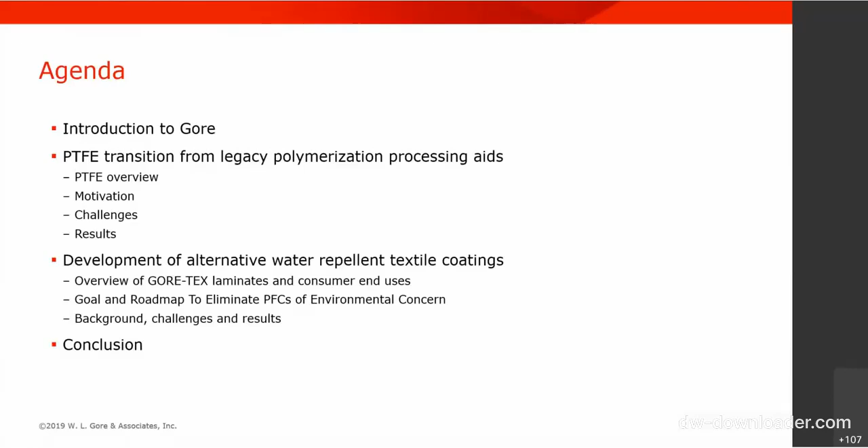Some of the audience might not be familiar with W.L. Gore & Associates. We were founded in 1958 by Bill and Vieve Gore in the basement of their home as an entrepreneurial venture. It was built on the belief that the new polymer could provide high value to society. And they also had a vision of how the company could be organized to best utilize the talents of each person in that enterprise. And today we've grown to over 10,500 associates. We refer to our employees as associates, which emphasizes everybody shares in the success of the enterprise. And our annual revenues are around $3.7 billion. And we remain privately held so we can focus on the long-term payoff rather than short-term gain.

So our 60 years of research in expanded fluoropolymers is the core of our technical capability, and our fundamental understanding of the properties of PTFE-based materials helps us with the thousands of products that we are able to produce to change outcomes for people around the world. So one of our core values at GORE is our commitment to delivering products that meet our customer expectations and are fit for their intended end use. This sounds like a simple premise, but it differentiates us from our competitors because of our deep commitment to use sound science and fundamental understanding of our products to ensure that we can live up to this standard and stand behind our products.

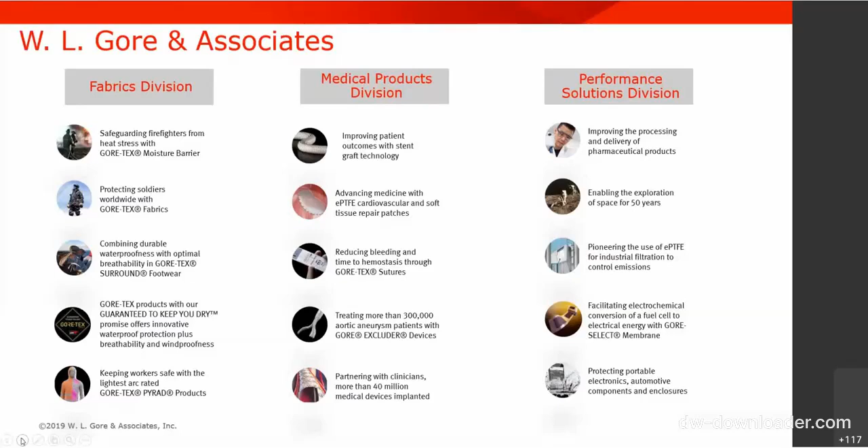And since discovering the expanded PTFE, like I said, we call it ePTFE, in 1969, Gore developed products using the combination of this ePTFE and complementary material science expertise, so we can have a good understanding of the application requirements. And with each new application, we're delivering some materials that improve lives.

So a quick overview of PTFE. So PTFE is polytetrafluoroethylene. It's the most common fluoropolymer used by Gore. It's a simple structure. It's a carbon backbone with fluorine attached directly, and it's a very large molecular weight, estimated to range from hundreds of thousands to millions of Daltons.

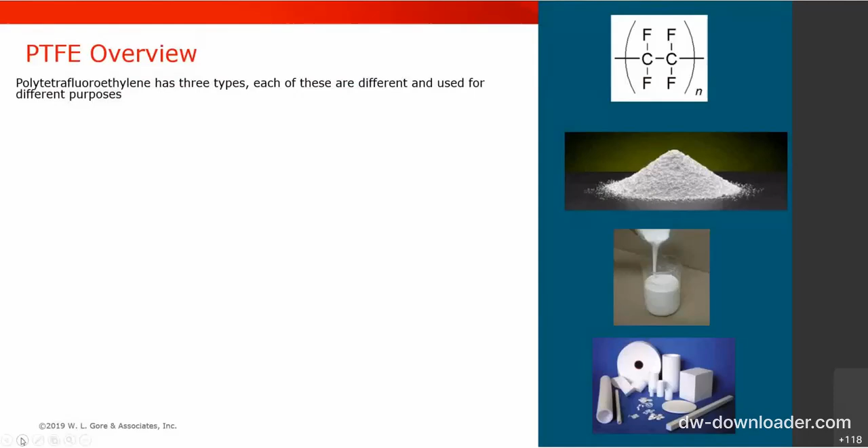And so the type of PTFE that we use is called fine powder. So it's pictured on that top image there. It's a fine white powder, and it's polymerized using a process that requires a polymer processing aid. So this is where the PFAS of concern enter the supply chain. And so for Gore, prior to 2015, our suppliers used PFOA and then transitioned to something else after that. And that's what we're going to talk about today. So this polymer is what we use to make our products.

Another version of PTFE is called an aqueous dispersion. It's a suspension of the same PTFE particles in a water-based mixture. And so it uses the same polymerization route. It does use the PPA as well. And it's used for coating different articles.

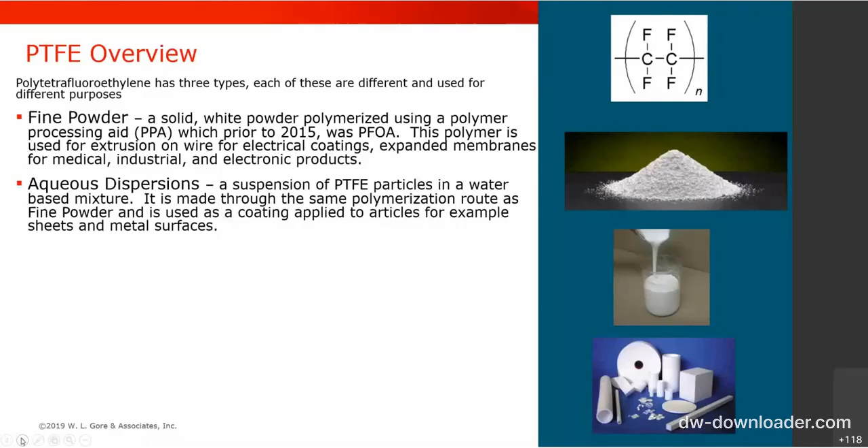And finally, the third version of PTFE is called granulated powder. It's also known as molding powder. And it's made through a different polymerization process that does not require that polymerization processing aid. And so it has its own unique market, but for Gore, it is something that does not fit with our needs. We cannot make expanded PTFE articles with this type of PTFE.

So typically, PTFE and other fluoropolymers have not been the focus of regulatory restriction efforts like those being applied to PFAS of concern. This was demonstrated in a peer-reviewed article that PTFE satisfies the OECD consensus criteria for a polymer of low concern.

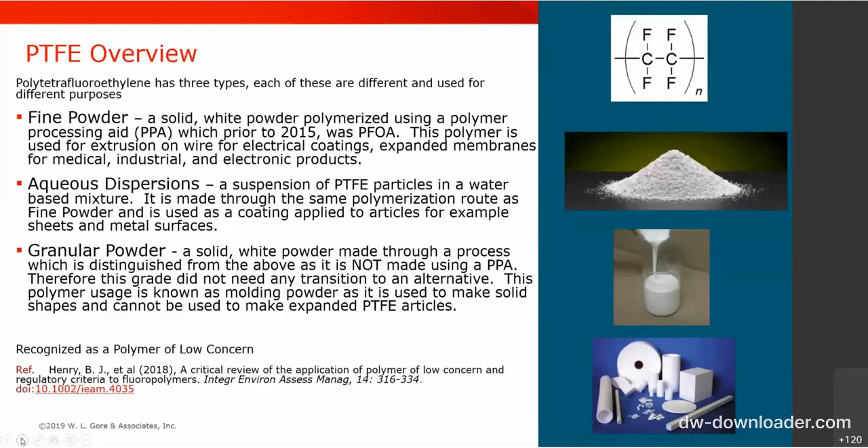So now I'd like to talk about the transition from the historical use of PFOA into the alternatives for the fine powder PTFE. So in 2006, the US EPA started a voluntary stewardship program and invited 8 manufacturers of fluoromaterials to reduce the PFOA emissions by 95% before 2010, and then virtually eliminate them by 2015. So Gore was not the manufacturer of PTFE, but participated as a processor. As you can see, the significance of this change would impact all the products made by Gore.

And so the connection between Gore and this transition was the trace residual PPA presence in that purchased PTFE, which is then further reduced in our processing. This transition would be really disruptive to the industry. If you think about it, there's been 50 years of operating experience and optimization, and now a new technology would have to be used to redevelop all the PTFE fine powder grades.

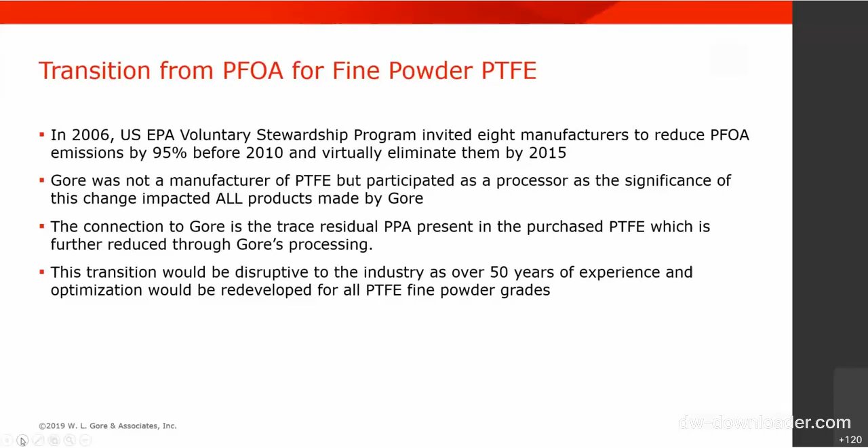So here we see a timeline that shows the regulatory progress of PFAS of concern in the top section, with Gore's investments and initiatives below the dashed line. Gore established initiatives to address safety, health, and environmental needs to continuously improve our process. We voluntarily invested in better control technology for each process and plant that was processing PFAS of concern.

When Gore suppliers transitioned to alternative polymerization aids, we put together a cross-functional team to evaluate the alternatives to minimize Gore's associate exposure to the alternative polymerization aids, verify the effectiveness of our environmental controls, and also assure that any small residuals remaining in our products cannot affect the safety or performance of our products.

So one of our goals was to do product stewardship reviews, and so we employed our Gore toxicologists who assisted us with the transition to the PFOA replacements by using sound science and standard best practices for toxicological risk assessment. The bottom section is showing the products and how they've undergone changes related to this topic over time as well. So our transition from long chain to short chain chemistries began in the late 1990s and involved new coating technologies for fabrics over the last 2 decades. And John will address this topic in his portion of the presentation.

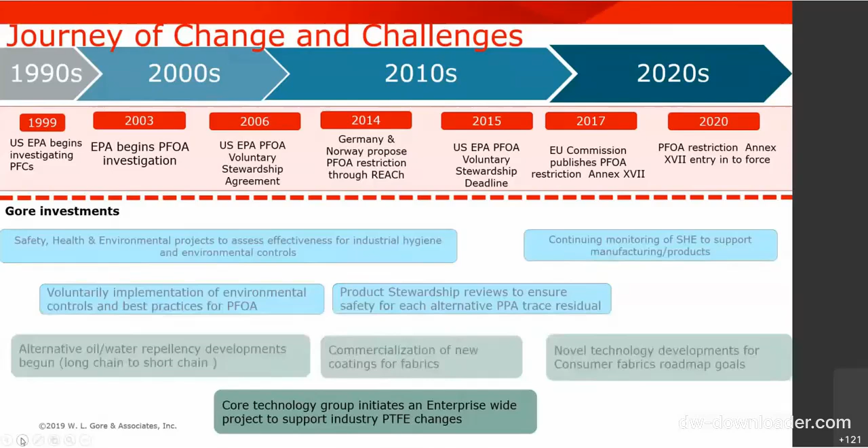So our journey started with assessment of, and requirement that, our PTFE performance for our future state had to match the original. And so to do that, we had to look at all the mechanical and thermal properties that were related to the PTFE. So if you remember the slide in the beginning with the division of products, it's a large number of products shown. So the magnitude of this challenge was kind of demonstrated early on when we were trying to assess what we would have to accomplish and look at the quantity of products that we might have to undergo this retesting for the fitness for use for our markets.

And so doing that, we mapped out the entire catalog of products that we used by division to try to put this information into a spreadsheet to get a handle on the project scope. And what we learned was that Excel 2003 did not have an infinite number of rows. It runs out at row 65,536. So we basically broke Excel.

So using some other tools, we put the whole product portfolio together and realized that we had 95,000 parts to assess. And so to shorten up that time frame for doing that assessment and evaluation, we had to find ways to really clearly identify the key attributes of the PTFE. And so we looked at it as an exercise to fingerprint the performance. And so to do that, we had to look at developing new techniques to do the analytical testing.

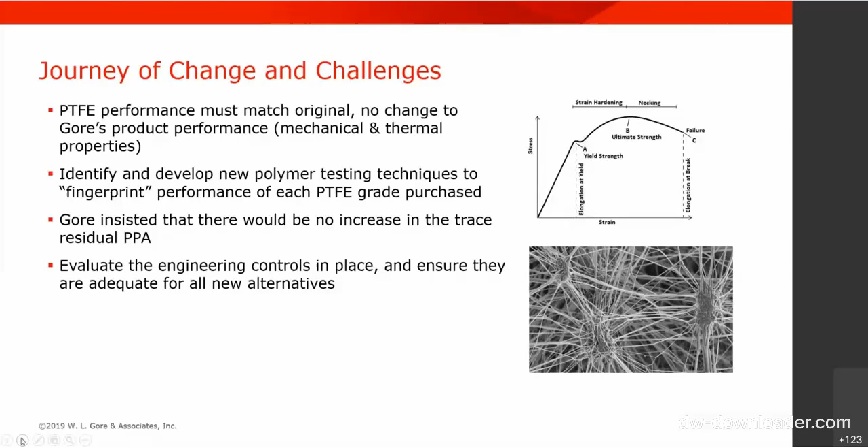And so the development cycle took many iterations, and although it reduced the amount of testing and qualification experiments necessary to prove the equivalence, numerous validations were still required to satisfy our product claims and our customer needs. But along the way, we also had to make sure that everything was suitable for our process, and so we had to evaluate the engineering controls we had in place through the processing as well as our environmental controls to ensure that they were adequate for the replacement alternatives.

And so at the end of this journey, we did successfully transition all of those products on time and without disruption. And so this took hundreds of associates to tackle this job. And because of this commitment to ensuring these products were going to be fit for use, we stopped doing a lot of innovation so that we could focus on this technical challenge. And so during the 9 years it took us to transition from the early development stages of the PTFE available through the success of the Gore products, we spent a lot of hours not doing new product development.

So the ray of sunshine through this change was we sure learned a lot more about how to paste process PTFE and relate that to the products and performance. And so we're able to use that knowledge that we learned to leverage into new product developments today.

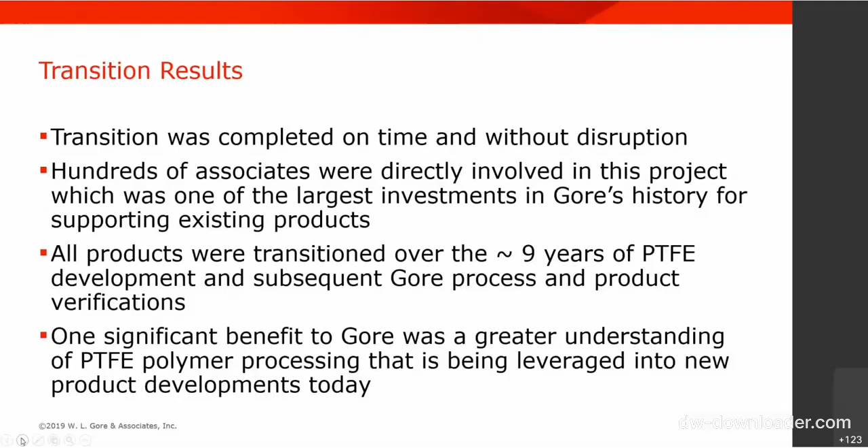So hello, my name is John Hammerschmidt. I'm the Sustainability Technical Champion for Gore Fabrics Division. As a matter of introduction, I've been a research scientist focusing on development of polymeric materials and coatings for a little over 20 years, the last 10 being with Gore. I'm currently leading the technical effort to deliver on Gore Fabrics' goal for eliminating PFCs of environmental concern from our fabrics consumer products. Today I'll be sharing some portions of this alternative materials development journey that we're on. And the focus today will be specifically on our consumer products business.

To start out, I thought I would show some of our product forms. Gore is an ingredient brand, and we produce laminates. The laminate structure is a cross-section right here. There potentially could be a backer or a lining. Then there's our Gore-Tex membrane, which provides the waterproofness and allows breathability of moisture vapor. And on the top layer is an outer material or an outer shell textile. And that is treated with a durable water repellent. This allows for beading, but also has impacts on water weight gain, which has implications for comfort.

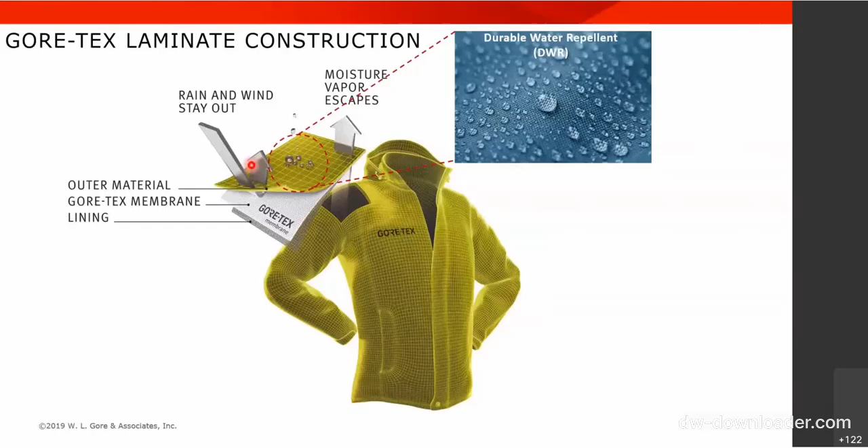In addition, we also have different product forms, which are gloves as well as shoes. So we do provide also inserts for both of these product forms.

Gore has a Guaranteed to Keep You Dry promise for our Gore-Tex windproof, waterproof, and breathable products. So we take fitness for use very seriously, assuring products will do what they say they will do. And if you are not completely satisfied with the waterproofness, windproofness, or breathability of these products, we will repair it, replace it, or refund your purchase price. Also, just a note here, I am providing some references on the bottom of several of these pages if you want more information.

So let's step into our goal to eliminate PFCs of environmental concern. As you'll see here, we use the term PFC. Throughout this presentation, I will use PFC terminology as opposed to per- and polyfluoroalkyl substance terminology. I'll use them interchangeably for the presentation. PFC terminology has been adopted quite a bit in this industry, and I want to be also consistent with the language that we put together for our goal.

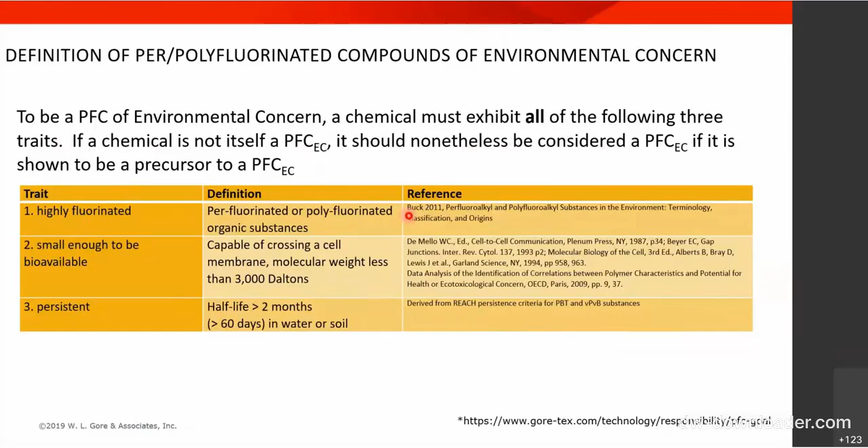So let's step into the goal. In February 2017, we set ourselves an ambitious goal to eliminate PFCs of environmental concern from the life cycle of our products. And this came about in a two-step initiative. The first key milestone is by 2020, we're looking to eliminate PFCs of environmental concern from the life cycle of 85% of our product units. This includes jackets, shoes, gloves, and accessories. The second initiative, from the consumer market, is between 2021 and 2023, Gore Fabrics will remove the remaining PFCs of environmental concern from our products.

I wish to highlight the life cycle aspect. So this is beyond just the product side. This goal encompasses both upstream into our supply chain as well as downstream to end of life. To meet this goal, it requires development of new alternative materials for our membranes and water-repellent coatings. Therefore, this is a significant effort to transition our products, and it touches all of our products that we have.

I wish to also mention, as we reported earlier this year, we're working very hard to deliver against this 2020 goal, but we've had to accept that innovation doesn't always go to schedule, and we have communicated to the marketplace that we will not meet the full goal of 85% by 2020. But the progress we're making gives us confidence that we will meet these goals, albeit a little delayed.

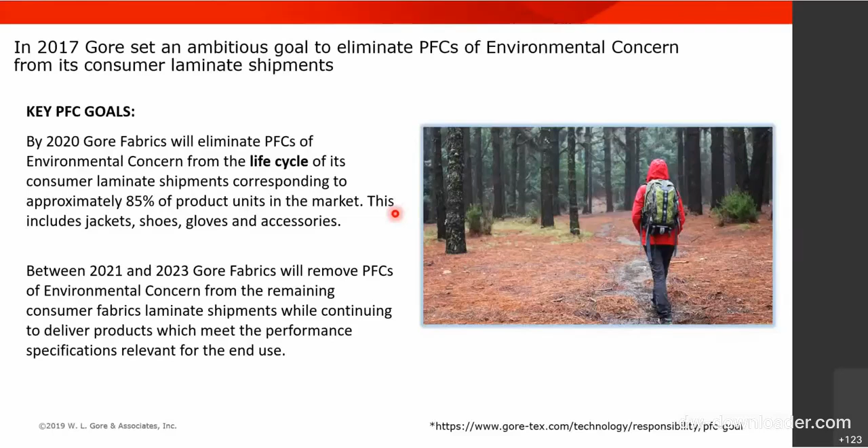Just to highlight a few of the other milestones within our goal. We spoke about the first two aspects. We have also achieved the milestone of introducing a new DWR for the fall-winter 2018 season, and that's what I'm going to be focusing on going forward in this presentation.

We've provided product labeling as well to allow consumers to connect to Gore Fabrics progress. We have a milestone for new ePTFE barriers made without using PFCs of environmental concern as polymerization aids, as Joe mentioned earlier.

We've also stated publicly that we are exploring and actively pursuing complementary membrane materials, and have focused our efforts in this space, though there's still significant technical work to do. I'll allude to this later, but we have a parallel development in DWR for some of the more challenging technical uses.

We have recently completed an incineration study to evaluate representative municipal incineration conditions, and details of that study have been published in Chemosphere earlier this year. Finally, we have standardized our hazard assessment approach, completing it at the end of 2018, and going forward we'll be looking to report against that as well.

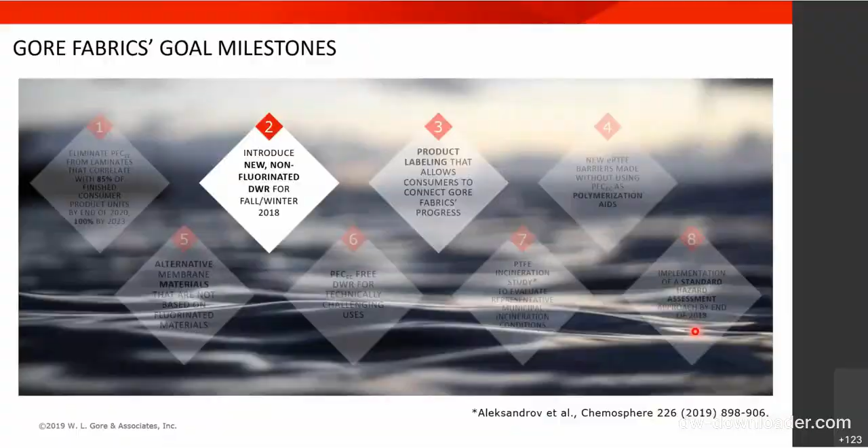So now let me focus on one aspect of this, the remainder part, which is really towards discussing the efforts it took to deliver on our 2018 new DWR. I'm going to start with a little background on DWR, then discuss some evaluation methods, and then a timeline of what was a multi-year development effort, to give you some context of the challenge we faced.

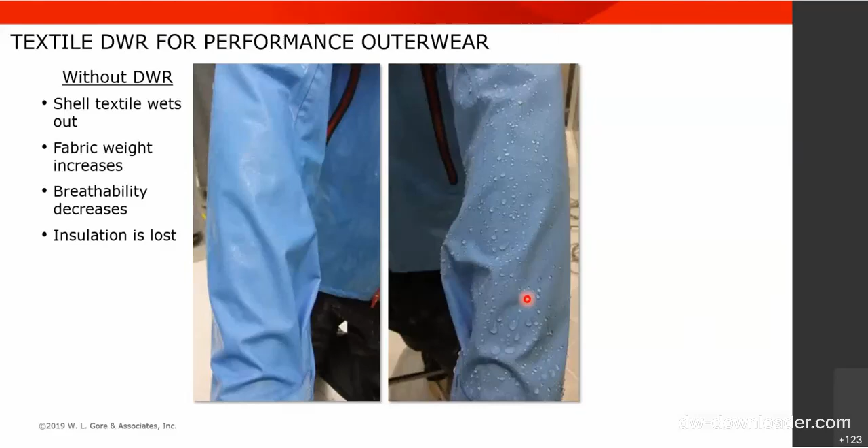Without DWR, the shell textile does wet out. The fabric weight increases, breathability decreases since it's blocked by water, and insulation is lost. The loss of insulation is really due to the fact that without DWR, air, which is a very good insulator, in the face fabric, is replaced by water. Water has greater than 20 times higher thermal conductivity compared to air, and this translates to a rapid change in local skin temperature.

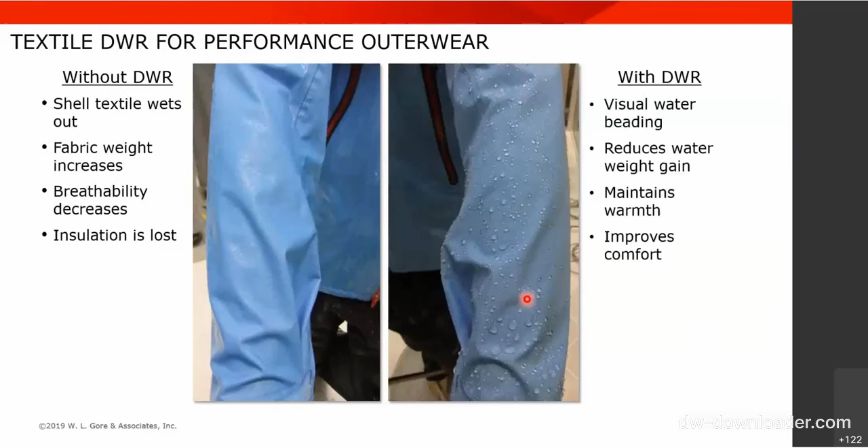With DWR, you'll see the visual aesthetic of the beading. It reduces water weight gain, maintains warmth, and improves comfort. I was looking for a concise way of summing up the importance of DWR, and I found this quote in a previous review article that basically sums it up well: avoiding wet-out can be a comfort issue, such as cycling or walking to work, but it can also be essential protection in more extreme conditions, especially when no shelter can be reached. Wet-out can cause significant cooling of the wearer, and under extreme conditions, this can be life-threatening.

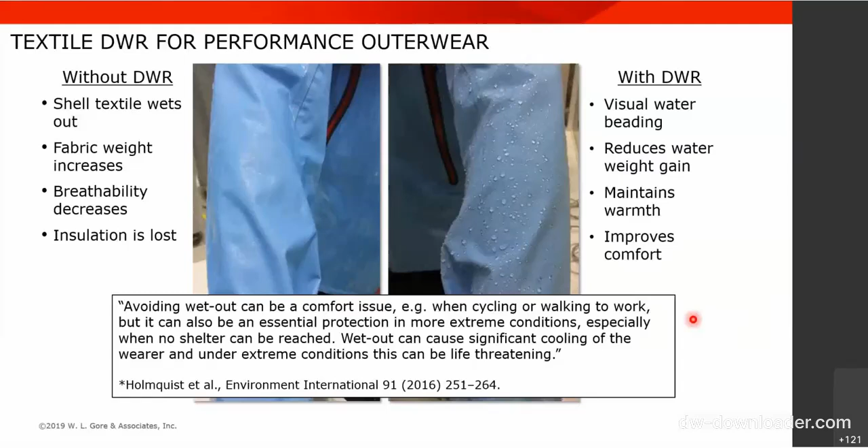Here's a list of criteria required for DWR that we consider during our development. There's obviously aspects of repellency, water and/or oil, as far as initial performance, but more importantly is the durability of this. There can be different stresses that reduce overall performance, such as wash durability, contamination from detergents and other materials, and also flex damage.

Additionally, we look at field performance, which effectively stresses and challenges the DWR across many of its failure modes. There's comfort aspects, which I alluded to already. One additional factor beyond breathability or moisture transport that DWR could affect is stiffness in hand. There's aesthetics and quality issues in particular—there's a whole host of these, I'm just listing a few here. Color fastness is one that basically characterizes the material's color resistance to fading or running.

And finally, product stewardship. Gore does use third-party standards, so we've adopted the Oeko-Tex 100 standard as a product safety standard, which requires all of our materials to be approved. In addition, our finished fabric laminates undergo tests for harmful substances to ensure that finished textile laminates are safe to be worn from a chemical point of view.

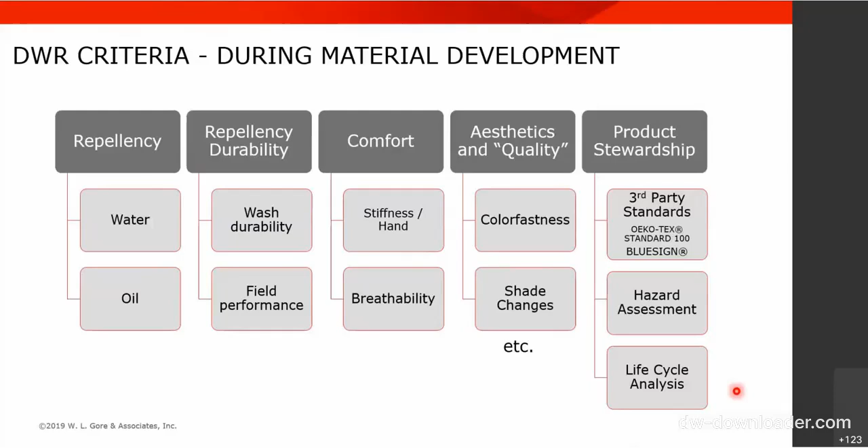So I think, to this group, the material sets here are quite familiar. There's been discussions on these in the past, I believe.

Traditional materials that have been used in the past from the textile industry started out with long side chain fluorinated polymers. I'm showing here a homopolymer of the fluoroalkyl material set. It does have a long chain on it. Gore completed our final elimination of these materials from our functional fabrics at the end of 2013.

So we are no longer using those materials. Our transition materials were into short side chain fluorinated polymers, showing two different varieties, commonly known in the industry as C6 or C4. There are various versions of these. I'm just showing a homopolymer, but there are copolymers of these materials, different aspects of these polymers as well. And those changes in the polymer makeup can actually affect the DWR performance, so not all these materials have exactly the same performance.

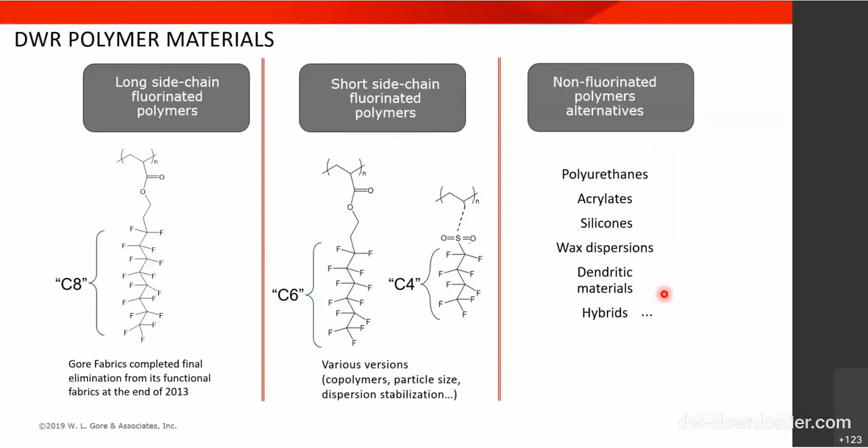And finally, the topic of much effort in development these days is the non-fluorinated polymer alternatives. A wide range of materials that this encompasses, which includes polyurethanes, acrylates, silicones, wax dispersions, many structures like dendritic materials, and hybrids of these.

At Gore, we have some proprietary rain room test methods as well. This is how we do our evaluations to down select materials. In our rain rooms, these methods mimic real raindrop size distribution and impact pressures. We can evaluate beading and measure water weight gain.

Our models incorporate many different stresses, so initial performance, we also looked at many different stress states and also regeneration. And over the decade or so, we've developed this test method. It has connection to our field performance data.

In terms of field trials, it is a capability that we have to place materials in a wide range worldwide in different environments. We treat these as experiments, and we can design the level of control and even take jackets at different intervals back from the field and do additional testing on that.

We can target end uses. These are statistically relevant sample sizes we use to allow for generalization to a larger population. And we put significant hours of wear. These are hundreds of hours of wear over many months and can be more than a year in some cases as well.

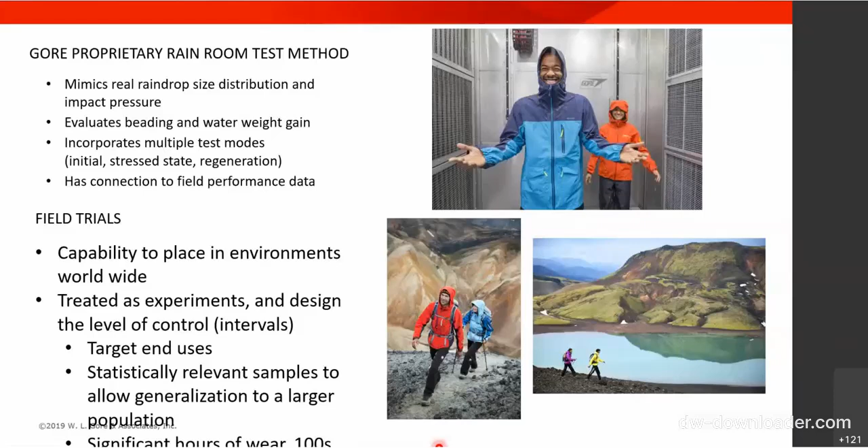So let's look at some data here. This is our rain room lab evaluation, looking across around 25 or 30 different materials that we've evaluated. And these are all non-fluorinated based DWR polymers. In this plot, you'll see water weight gain on the y-axis and beading rating on the x. Highest performance would be towards the lower right-hand part of this chart.

To give you some calibration, the beading performance here is a visual rating from 0 to 5, 5 being the highest, and anything less than 3 is beginning to show some degree of wet out. As you'll see in our evaluations here, we have a wide range of performance with the non-fluorinated based materials, and I'm comparing them to a high-performance short-chain based polymer DWR. Additionally, you'll see there is some slight measurable difference between our short-chain based material and the non-fluorinated materials that we've evaluated, but across that range, some materials have essentially no performance all the way to higher performing ones.

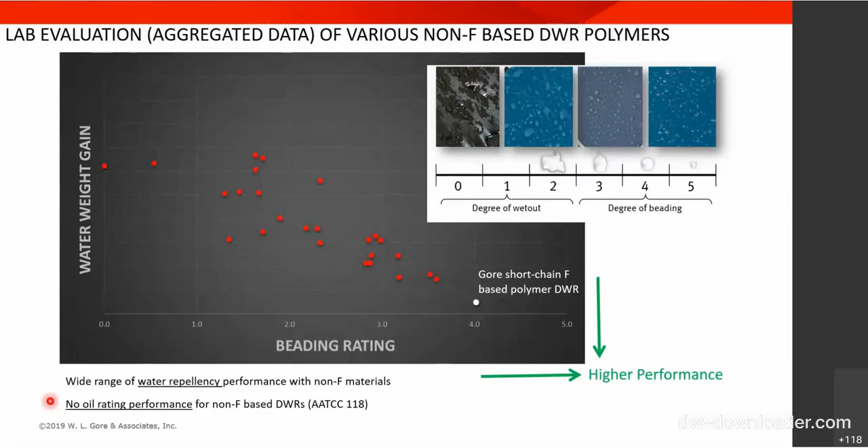And we use this method to down select further in terms of our evaluations and go into field trials. Also want to note, as I think this group knows quite well and has been published quite a bit and discussed, these non-fluorinated materials do not provide any oil rating based on the AATCC 118 test.

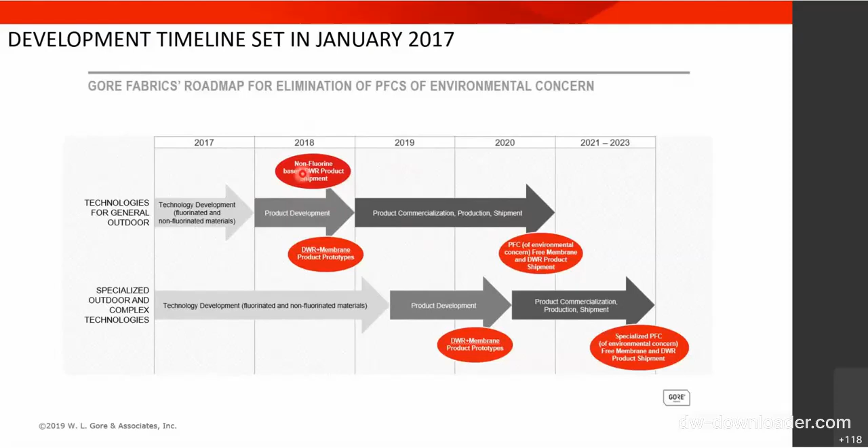So let's focus on one aspect of this: the milestone we put together for the 2018 non-fluorinated-based DWR shipment. Let's drill down into what that development looked like.

The performance we had in that field trial was quite poor. We had really strong feedback from our users that the performance level was not adequate, not fit for use, for the applications we have for Gore-Tex.

We went back to the lab. There was significant development in 2014 and 2015 by many suppliers — many significant efforts in this space.

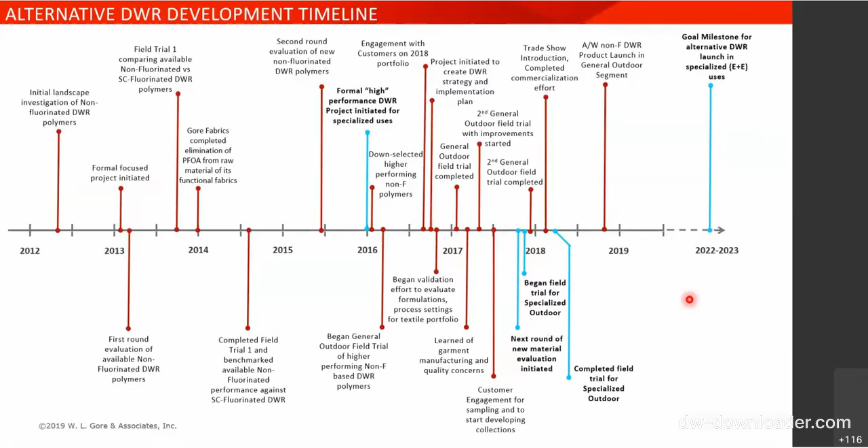In conclusion, I just want to thank you for the time and opportunity to present today. I hope Joe and I have been able to convey the passion we have for the products we make, our focus on fitness for use, and our commitment to continue improving the environmental footprint of our products over their life cycle.